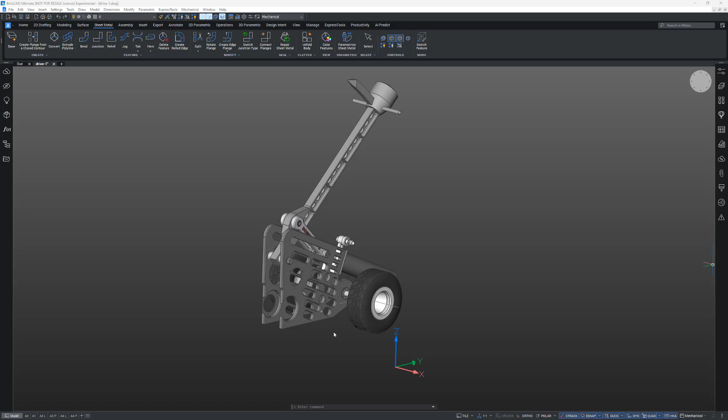Hi, in this short video I'm just going to show you how easy it is to create a component based on the geometry of other components in your assembly.

So what we've got is a robot here, and what I want to do is create a hub that's going to hold the drive shaft and the bearings, all that in position.

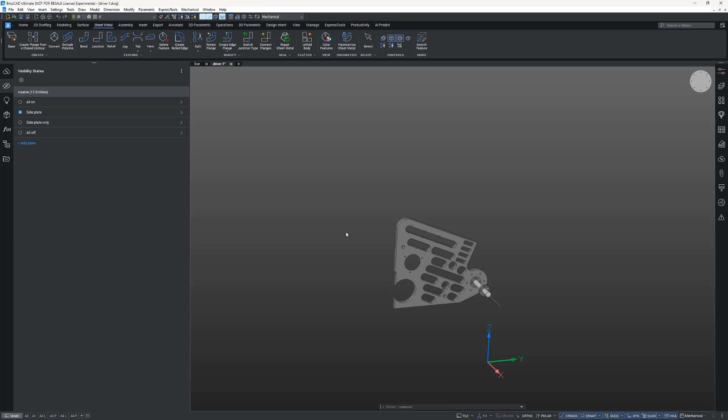I'm just going to turn off the components I don't need using the visibility states, so we just need the side plate, the drive shaft, and the bearings shown. I've also already created a section plane based on the center line of the drive shaft, to save time, so we're just going to activate that.

What we're going to do is look at our top view, and we're going to create a sketch, 2D drafting, and polyline. Now we can snap to the edges or midpoints of components we've already got there. I've got my ortho turned on, so we're just going to come out horizontally here, and then position there.

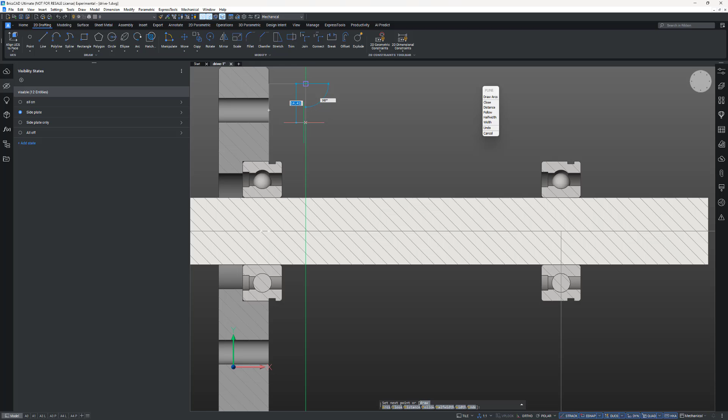I know we've got a bolt that's going to go through here, so I'm just making sure we've got some clearance there. Then we'll take it up to the top, using a track command to get everything in the right position, so we're dead level with the end of that bearing. And again we're tracking there, so the bearing sits in as we want it to.

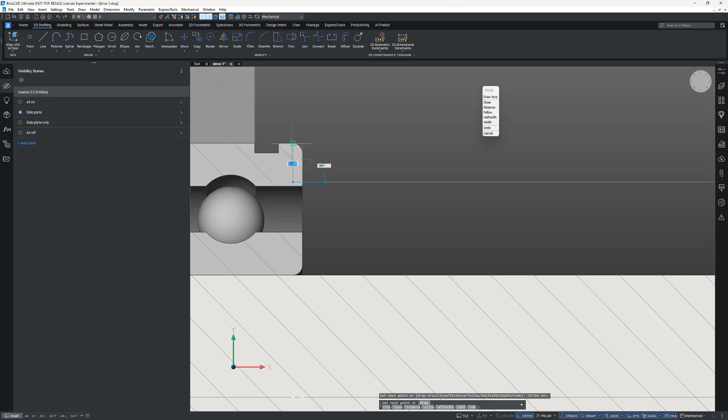And there we have it, so we've got our profile. What we want to do now is revolve this around the center line of our shaft.

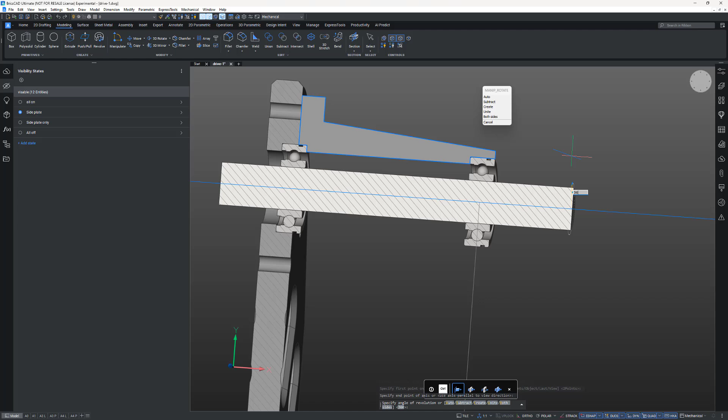So we're just going to go to our modeling command, choose revolve, select our profile, and say we want to go from the midpoint or center point of our drive shaft to the other end, 360 degrees, so we get a full rotation. So that's our hub basically created, very, very quick, very, very easy.

What I now want to do is just add some extra features to that. So I'm going to turn off the section view, and also these other components I don't actually need, so I'm turning everything else off.

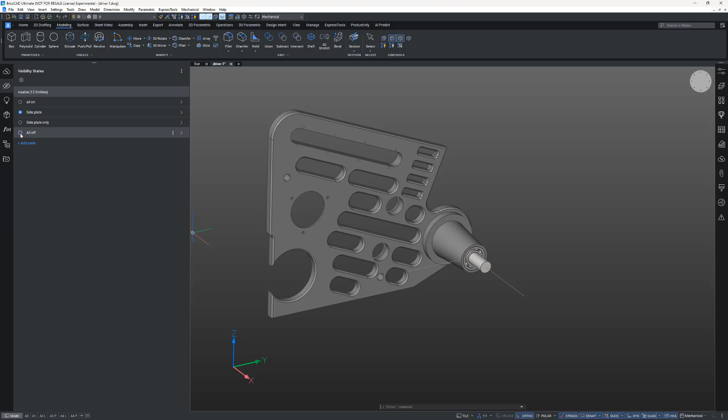And then we're just going to add a fillet on these sharp edges, just make that a 3mm fillet.

What I now want to do is add some holes in here so I can bolt it to the side of the robot, and to save a bit of time, I've already created a block.

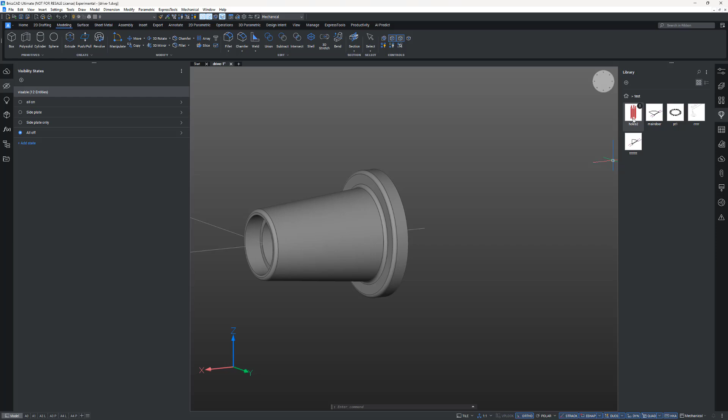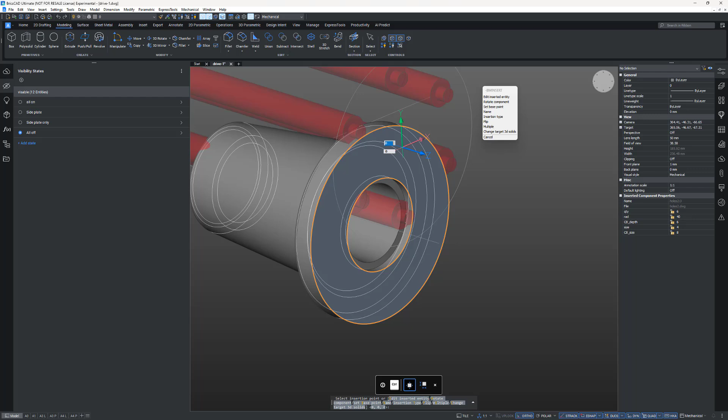So we can come in here, and now I can drag in my holes block. This has been created on the BC_Subtract layer, so it's going to act as a cutting tool effectively. I want to position this on my block, or my hub, so I just want to come into that face here, and we just choose the center of that component there. So that's now created the holes for us, because it's on the BC_Subtract layer.

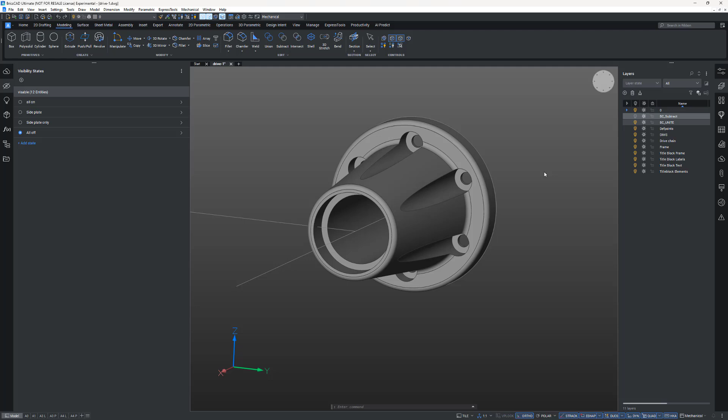Just to show you this, if I go to my layers command and turn on BC_Subtract, you can now see the block, and if I turn the layer off, you just see the result, which is the holes. So now I can bring other components back in, and I need to align the holes in the hub to the holes in the side plate.

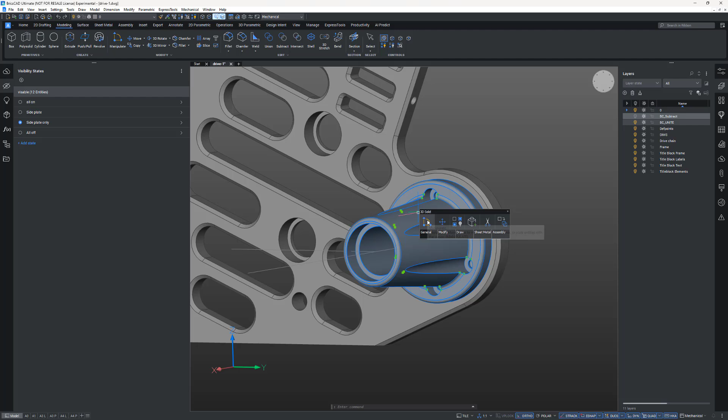So I'm just going to select my component, and I'm going to use the manipulator to rotate this around. Again, we could put a dimension in here and use a constraint to align the centers of the holes, but I'm doing this a little bit rough and ready so we can see what we're actually doing. So there's roughly the right place.

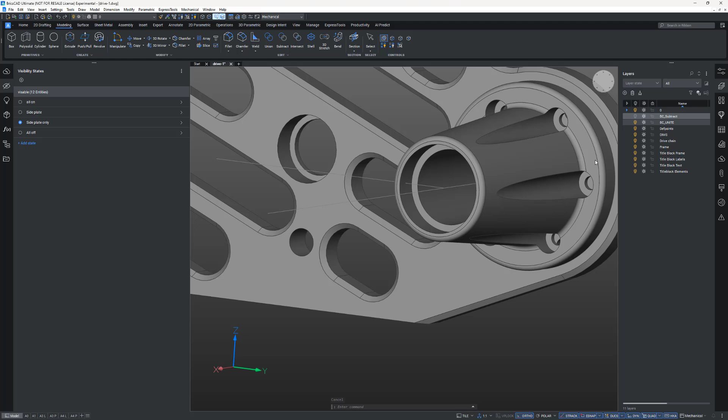But straight away we can see that the holes don't align. Now luckily, when I created the block for the holes, I added some parameters to it, so we can simply go to our parameters, find the holes, and change that radius to 45. Now we can see the holes are all aligned.

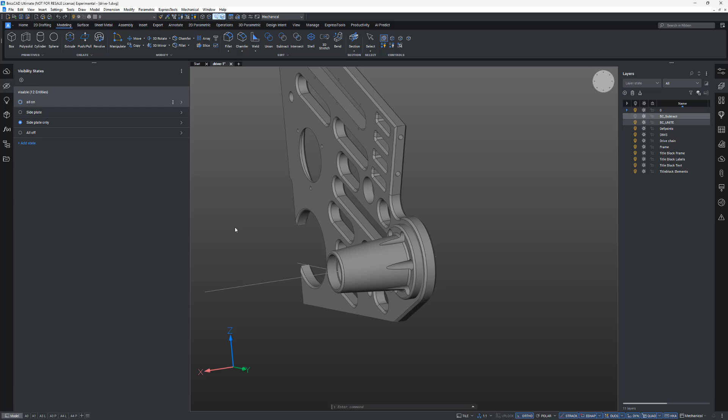So with that done, we can come back to our view and turn everything back on again. As you can see, everything fits perfectly, bearings are safely mounted, and we can just bolt that straight on.

If you wanted one on the other side, just do a mirror, copy, paste, whatever you prefer. So as you see, nice and easy to do. Hope you enjoyed that. Thank you very much.